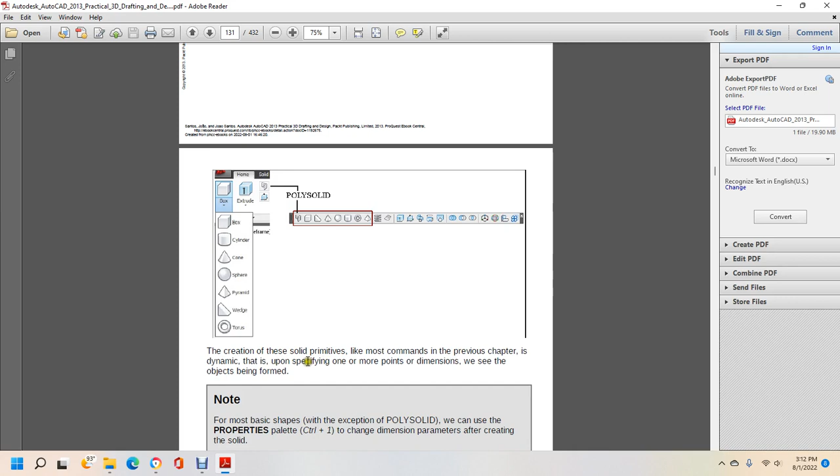Solid primitives list most of the commands from the previous chapter with dynamic input for specification. One or more important dimensions are seen as the objects are being formed. Note that for most basic shapes, with the exception of the polysolid, we can use the Properties palette, Control+1, and change the dimension parameters for creating the solid.

Improve the visibility of curved faces with the non-wireframe visual styles. This will apply with the Facet Resolution variable. A value of 2 or 3 is usually normal enough.

The wireframe visual styles may apply with the ISO Lines variable, which increments the number of lines used to represent the curved face. The Display Silhouette variable can also be used to show a silhouette profile line on solid curved faces, a variable explained at the end of chapter 4.

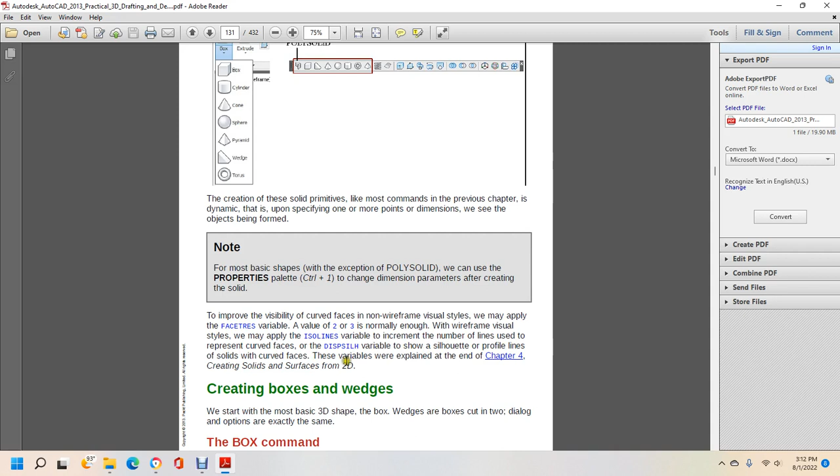Creating solids and surfaces from 2D objects.

Creating boxes and wedges. We show the most basic 3D shape, the box. Wedges are boxes cut into two, and the dialogue options are exactly the same.

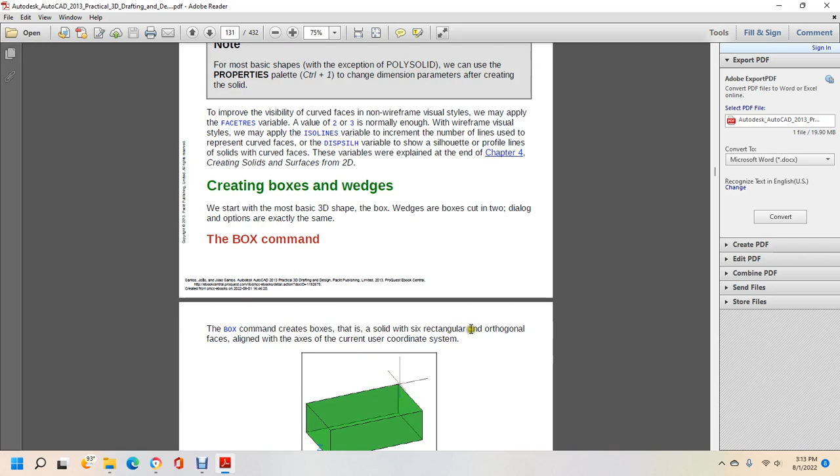The Box command creates a solid box with six rectangular orthogonal faces aligned with the axis of the current user coordinate system. By default the command asks for the first corner and the opposite corner. Command options are: first corner, opposite corner, cube, length, and point.

These two points must not be on the same axis, as they define the area of the base on the same plane. The height is then requested, specified with a negative value or created downward, specified with the height or a second point value. The easiest way to create a box is to specify the first corner and define the opposite corner relative to the first, specifying length, width, and height.

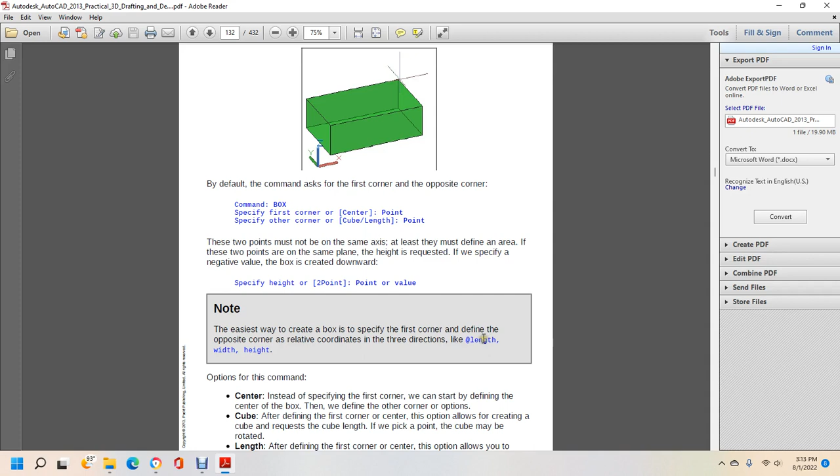Options of the command include Center. Instead of specifying the first corner, we can start by defining the center of the box, then define the other corner with the option. The Cube option, after defining the first corner or center, allows you to create a cube by requesting the cube length.

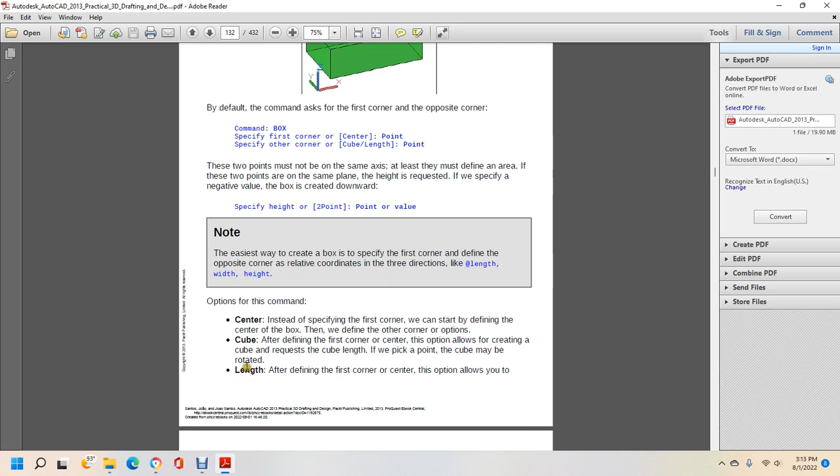If we pick a point, the cube may be rotated. The Length option, after defining the first corner or center, allows you to specify the length along the x-axis, the width along the y-axis, and the height along the z-axis of the box. If we pick a point to specify the length, the box may be rotated. The height of the box can also be defined by specifying two points.

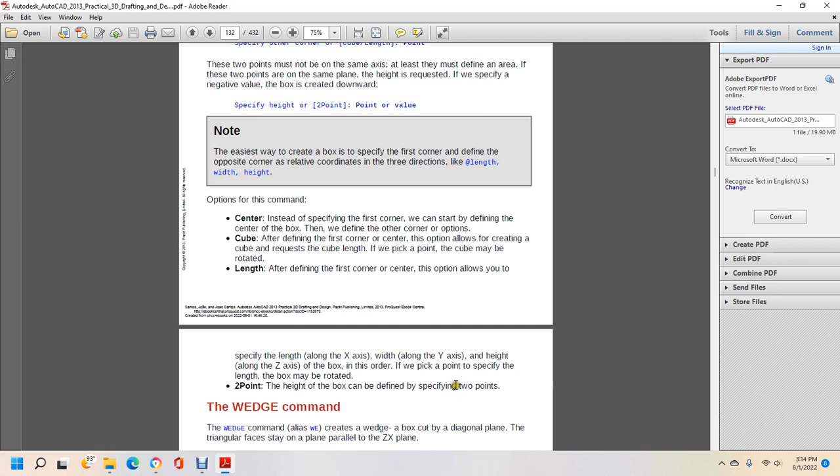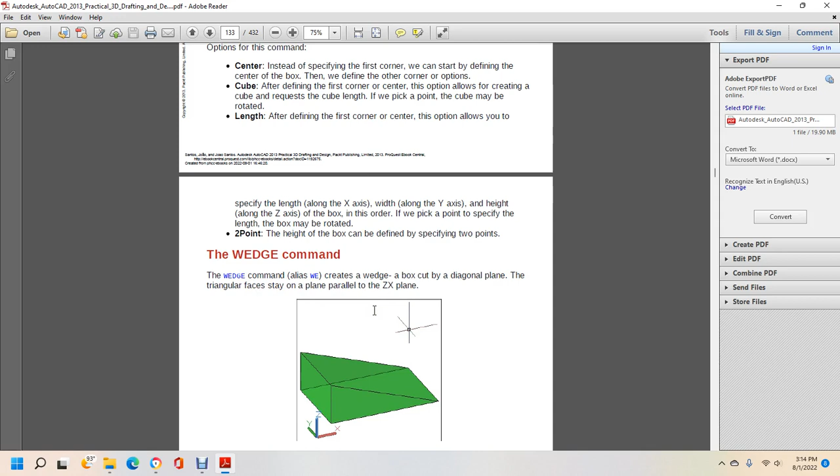The Wedge command, alias WE, creates a wedge, a box cut with a diagonal plane forming a triangular face parallel to the ZX plane. By default, the command asks for two corners: wedge, first corner or center point, other corner, cube, length, point. These points define the same base plane.

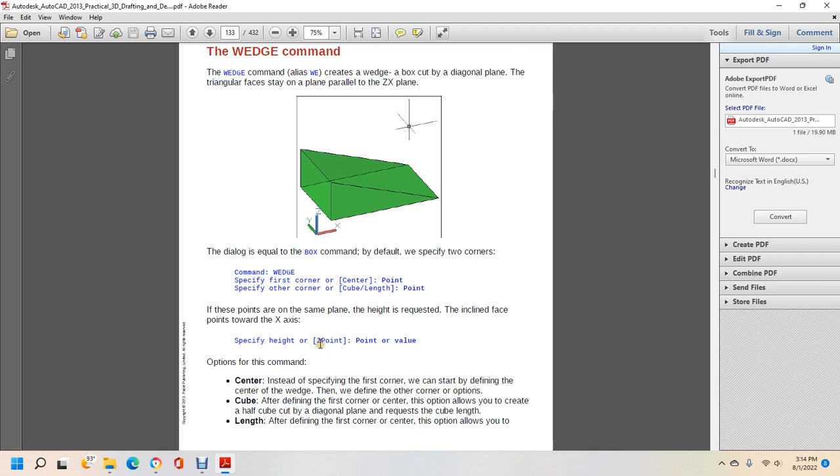The height is then requested, with the inclined face of the wedge pointing toward the x-axis, specified with the height or a second point value. Options for this command include Center.

Center: instead of specifying the first corner, we can start by defining the center of the wedge, then define the other corner with the option. Cube: after defining the first corner or center, this option allows you to create half a cube cut by a diagonal plane, by requesting the cube length.

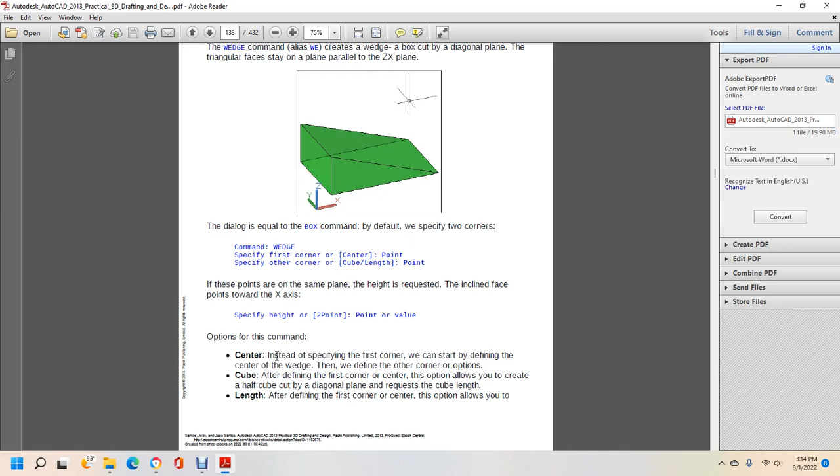Length: after defining the first corner or center, this option allows you to specify the length along the x-axis, the width along the y-axis, and the height along the z-axis of the wedge, in that order. The height of the wedge can also be defined by specifying two points.

We're going to create the basic shape of the building, similar to the cathedral. We start with a new drawing and create a layer called 3D cathedral, applied with the green color to make it current, then create a box.

The box has a length of 100, width of 40, and height of 45, with the first corner at the origin and the opposite corner at 100, 40, 45. We create another box whose center is in the middle of the top face.

We specify the center option of the Otrack function, aiming at finding the center over the top face. Another way to find the center is to apply the individual 3D Osnap center of the face.

Control mouse right click with the opposite corner, aiming at @15,15,20.

Later we will combine these boxes again, and create one tower with dimensions 10, 10, 30 at one of the top corners. We copy the last box from the top to the other top corner.

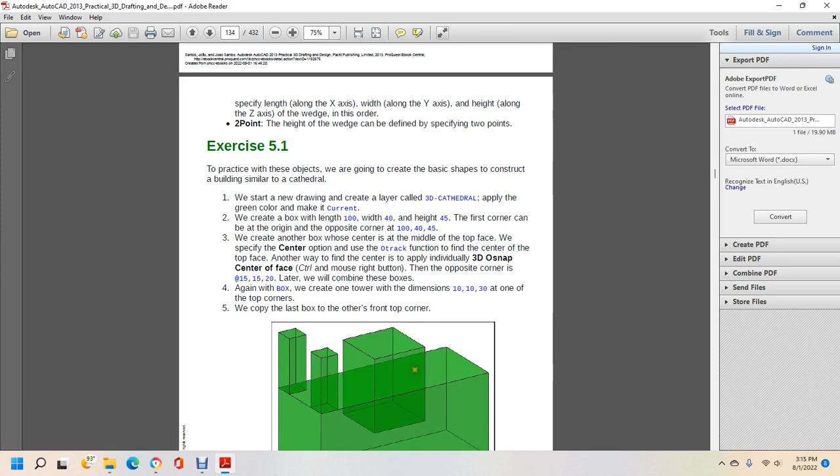Now it's time to create two wedges at the edge, like a buttress. We apply the wedge first to the left corner of the box, with dimensions 20, 5, 40. We create another wedge at the same first corner with dimensions 15, 5, and 30.

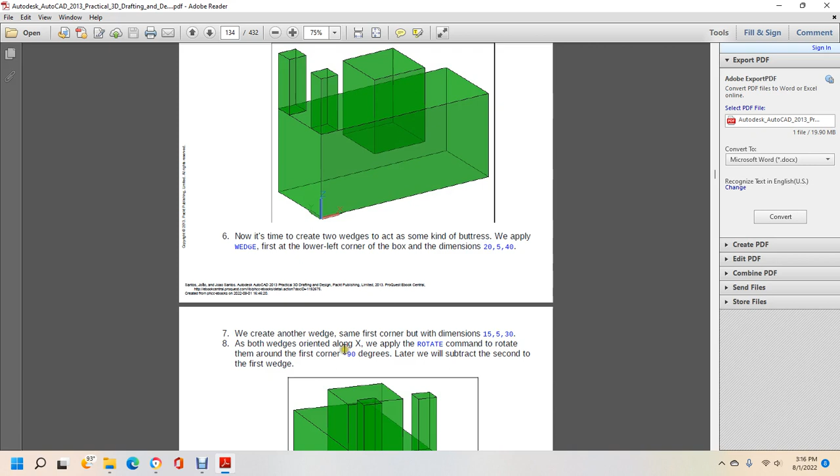As both wedges are oriented along X, we apply the rotate command to rotate it around the first corner by -90 degrees. Later we'll subtract the second from the first wedge.

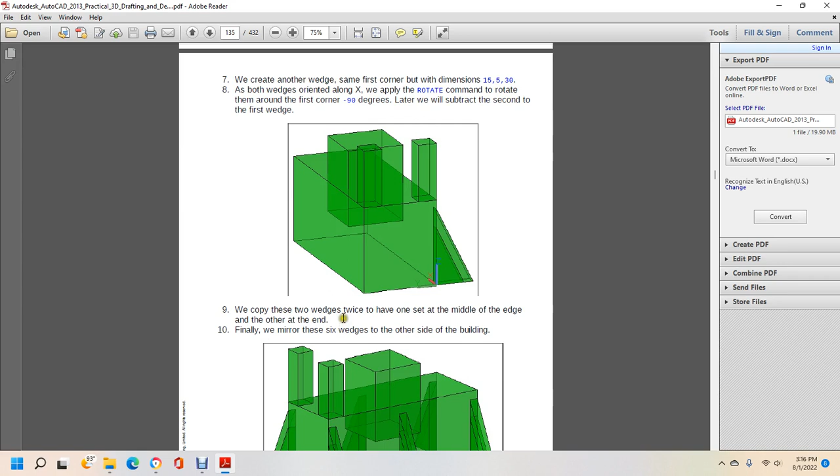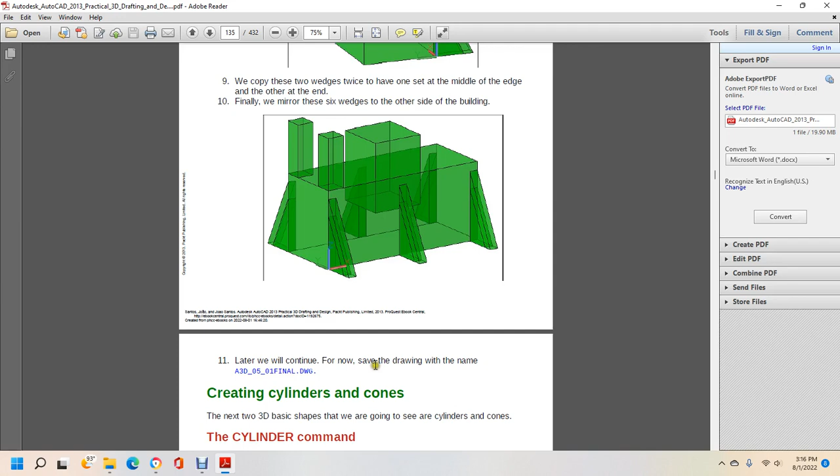We copy these two wedges twice to place one set at the middle and one at the other end of the edge. Finally, we mirror the six wedges to the other side of the building, and for now save the drawing as A3D_05_01FINAL.DWG.

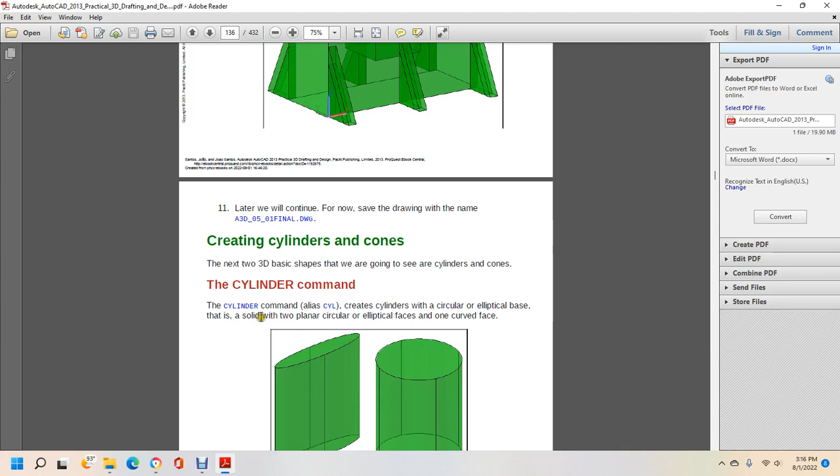Creating cylinders and cones. The next two 3D basic shapes we'll see are cylinders and cones. The cylinder command alias is CYL. It creates cylinders with circular or elliptical bases—solids with two planar circular or elliptical faces and one curved face.

By default, the command starts by prompting for the center of the base and the radius. The center option is the center of the base; you can also use 3-point, 2-point, tangent-tangent-radius, or elliptical options, then specify the base point and the radius or diameter value.

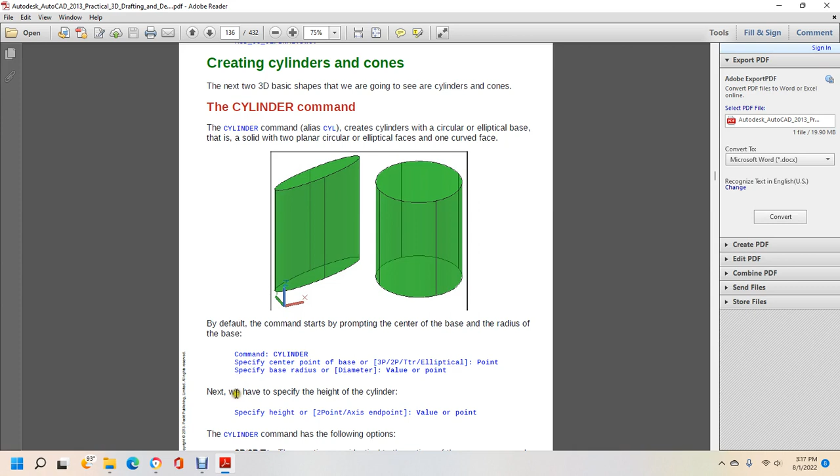Next we specify the height of the cylinder, using height, 2-point axis, or endpoint value. The cylinder command has the following options: 3P, 2P, or tangent-tangent-radius. These are identical to the options for the circle command.

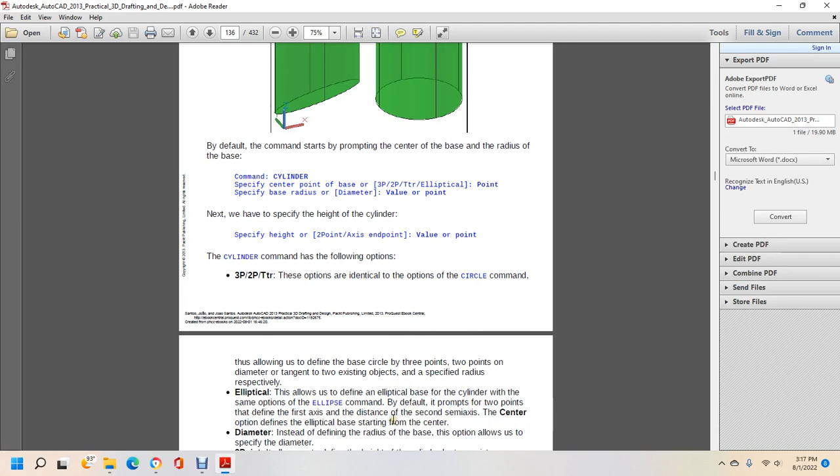This allows defining the base circle using 3 points, 2 points, or tangent to two existing objects while specifying the radius. The elliptical option allows you to define an elliptical base for the cylinder using the same options as the ellipse command.

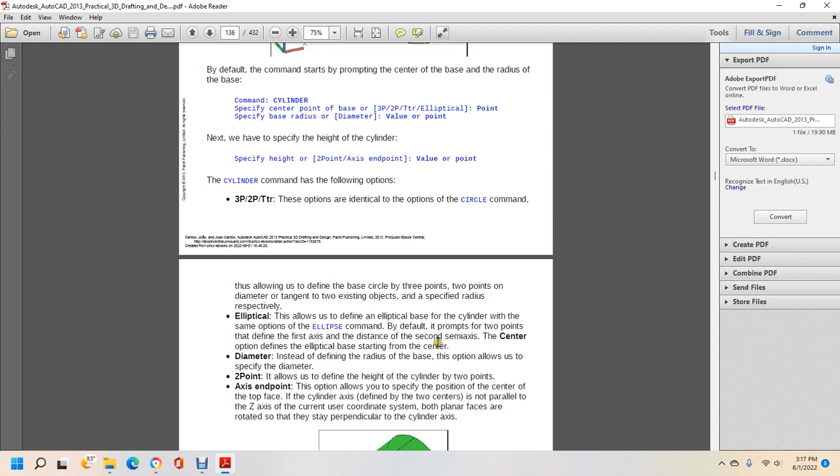By default, it prompts for 2 points to define the first axis and the second semi-axis, with a center option to define the elliptical base starting from the center, and a diameter option instead of defining the base by radius.

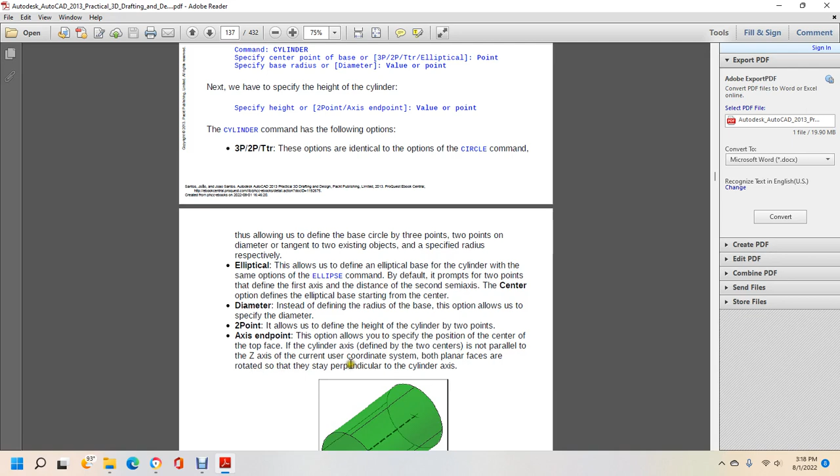The diameter option lets you specify the diameter by 2 points, and allows you to define the height of the cylinder. The axis endpoint option lets you specify the position of the center of the top face of the cylinder, defined by 2 centers not parallel to the Z-axis of the current user coordinate system, with both planar faces rotated perpendicular to the cylindrical axis.

The axis endpoint option allows us to create cylinders with bases not aligned to the current XY work plane, which may avoid the need to create a specific user coordinate system.

Now the cone command. The cone command, which has no alias, allows you to create cones or frustum cones.

In the first case, the object is composed of a curved face and a planar face; in the second case, it has two planar faces with a curved face.

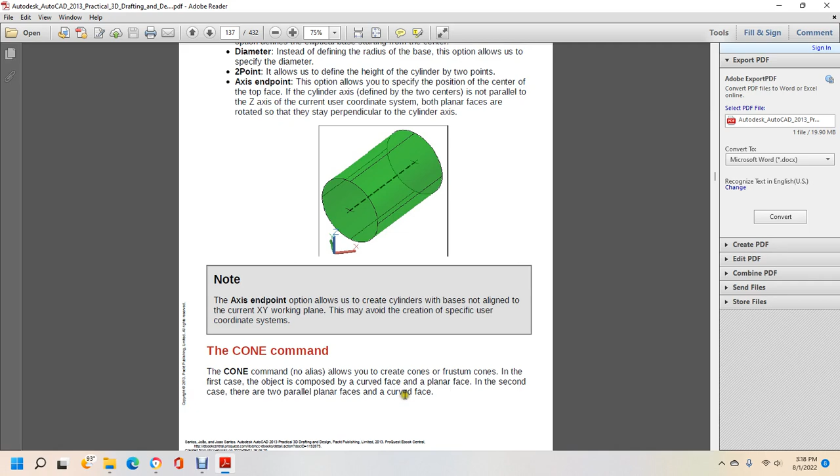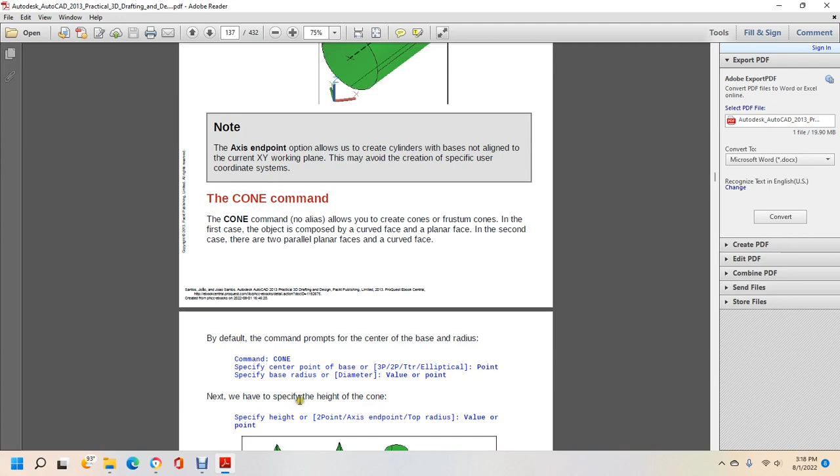By default, the command prompts for center, base, and radius. The cone command options include center and base and radius, 3-point, 2-point, tangent radius, elliptical. You then choose your point and specify the base radius or diameter with a value or point. Next, specify the height of the cone, or use 2-point axis endpoint, top radius value, and give the value of the radius or point.

Most of these options are similar to the cylinder command: center, 3-point, 2-point, tangent radius. These are identical options, but the circle command allows you to define the base of the circle by 3 point, 2 point with diameter, tangent to two existing objects, or specified radius respectively.

Elliptical allows you to define an elliptical base of the cone with the same options as the ellipse command, but the default prompt is with 2 points defining the first axis and the second semi-axis, with the center option defined with the elliptical base starting from the center. The diameter option, instead of defining the radius of the base, allows us to specify the diameter.

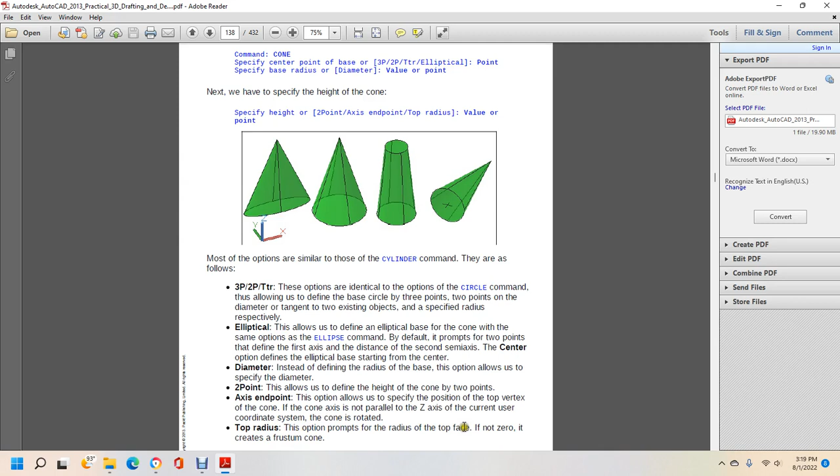The 2-point option allows us to define the height of the cone by 2 points. The axis endpoint option allows you to specify the position of the top vertex of the cone; the cone axis is rotated if it's not parallel to the Z-axis of the current user coordinate system. The top radius option prompts for the radius of the top face if it's not 0, and if so, creates a frustum cone.

Alright, exercise 5.2. Now we continue exercise 5.2. Let's open the drawing starting with exercise 5.1.

Continuing with the model of the building, we create a new cylinder with the center of its base at the center of the top face of the previous cylinder, with a radius of 8 and a height of 10. To create the columns, again using cylinders, with the center at the 180 degree quadrant on the top face of the first cylinder, with a radius of 0.8 and a height of 10. We move the cylinders inward by 1 in the X direction.

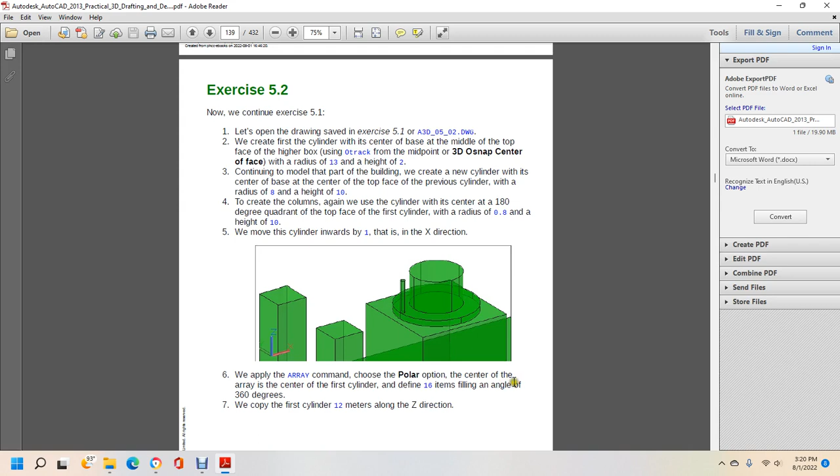Then, after showing the picture, we apply the array command, choosing the polar option, centering the array on the center of the first cylinder, defining 16 items filling an angle of 360 degrees, copying the first cylinder, 12 meters along the Z direction.

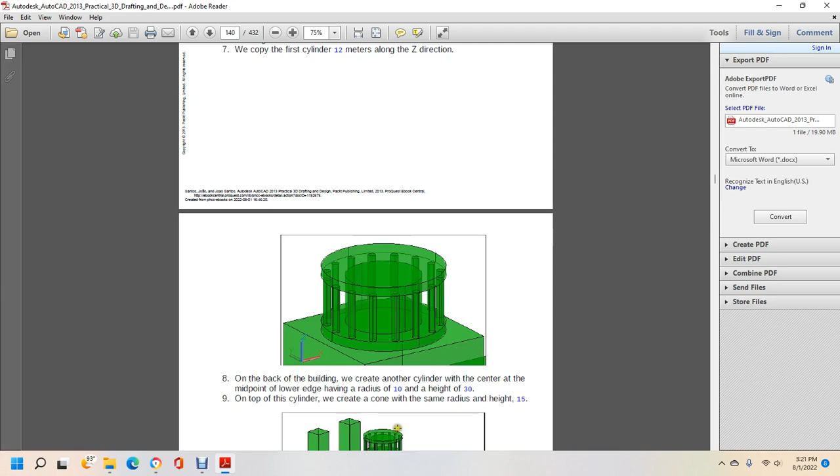On the back of the building we create another cylinder with the center at the midpoint of the lower edge, with a radius of 10 and a height of 30. On top of the cylinder we create a cone of the same radius with a height of 15. We save the drawing.

Save as A3D_05_02FINAL drawing, creating a sphere and another basic shape, the sphere or globe, created with the next command.

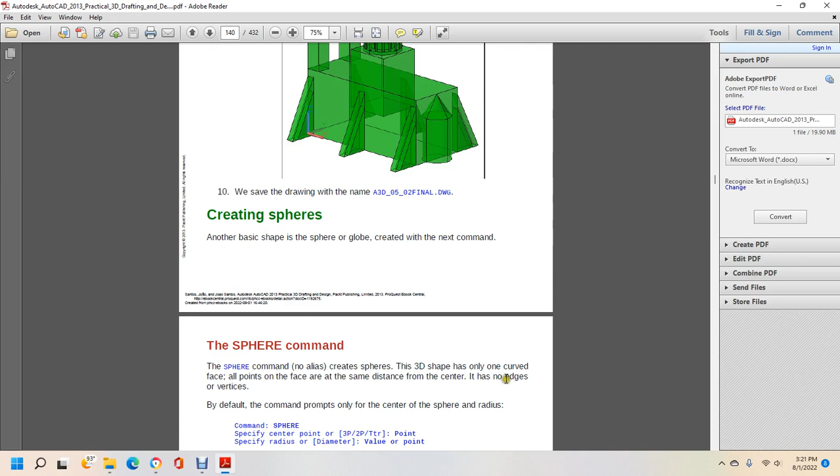The sphere command in AutoCAD creates a sphere, a 3D shape that has only one curved face, while all points of the face are the same distance from the center, with no edge or vertex. By default, the command prompts for the center of the sphere, the radius of the sphere, the center point, 3-point, 2-point, tangent, radius.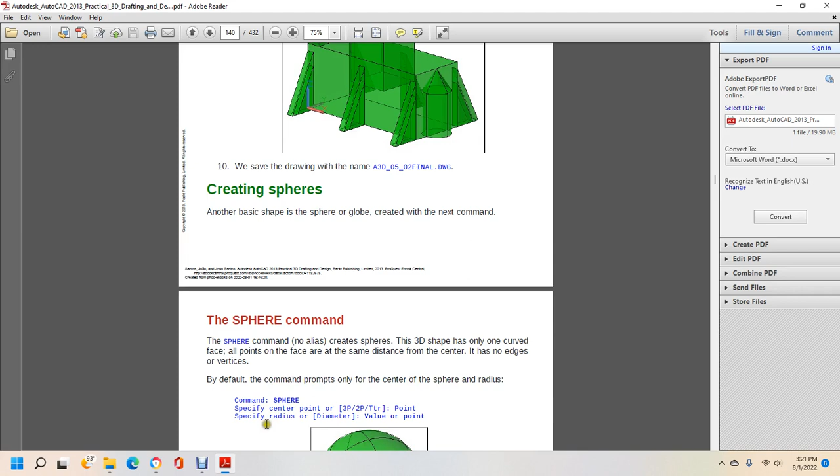Point specifies the radius or diameter with a value or point, and then shows the sphere option, similar to the previous command: 3-point, 2-point, and tangent radius.

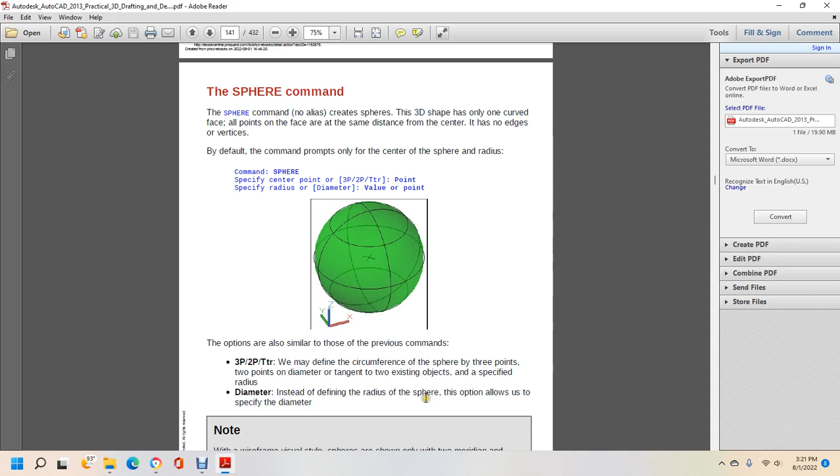We define the circumference of the sphere with 3 points, with 2 points, with a diameter, or tangent to two existing objects, specified with the radius. The diameter option, instead of defining the radius of the sphere, allows us to specify the diameter. Note that the wireframe visual style of the sphere shows only two meridians and three parallel iso lines.

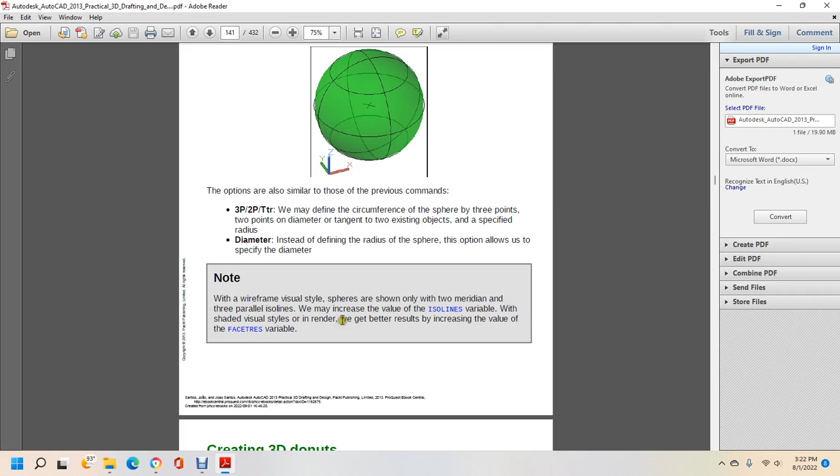We may increase the value of the ISOLINES variable with the shaded visual style with the render. We get the best result by increasing the value of the facet resolution variable.

Creating 3D donuts: if you want a solid shape like a donut, the torus, the shape can also be obtained by applying the revolve command to a circle. The torus command, alias TOR, creates toroid solids with a 3D donut shape. By default, the command prompts for the center of the torus, the radius of the torus, the radius of the circular section, and options like torus bisects the XY plane of the current user coordinate system.

The command prompt is: TORUS, specify center point or [3P (3 point)/2P (2 point)/Ttr (tangent tangent radius)], specify radius or [Diameter] for the torus, then specify the tube radius or [2Point/Diameter] for the second value.

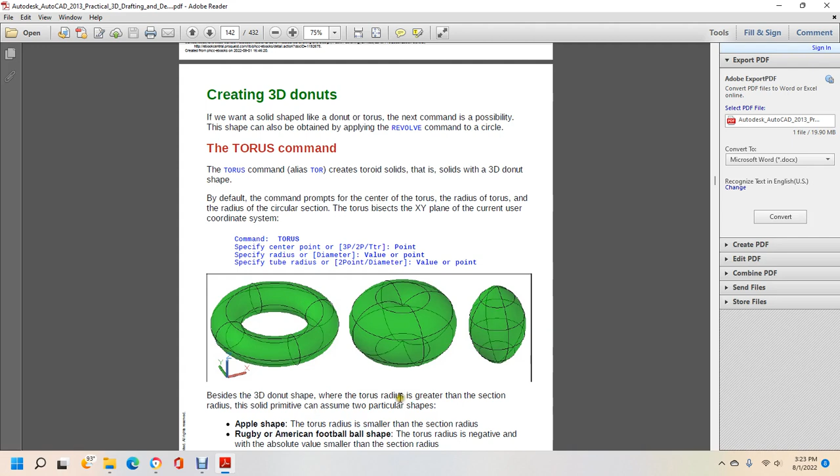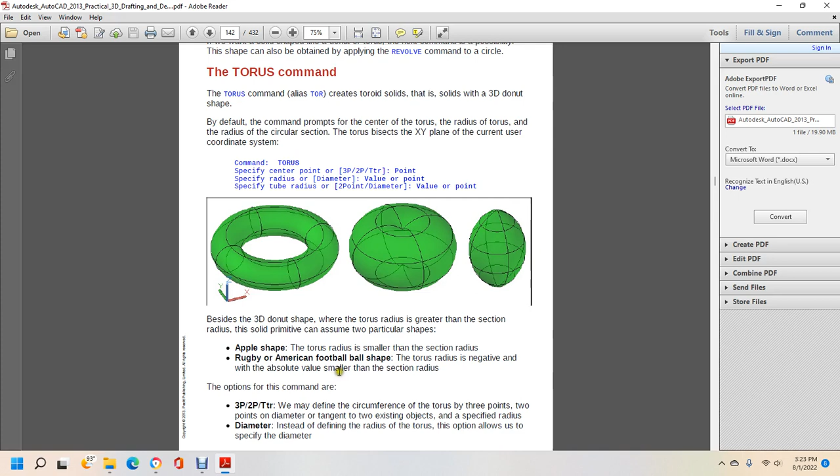The 3-point and tangent-tangent-radius options let us define the circumference of the torus. With 3 points or 2 points with a diameter, or with tangent to two existing objects with a specified radius.

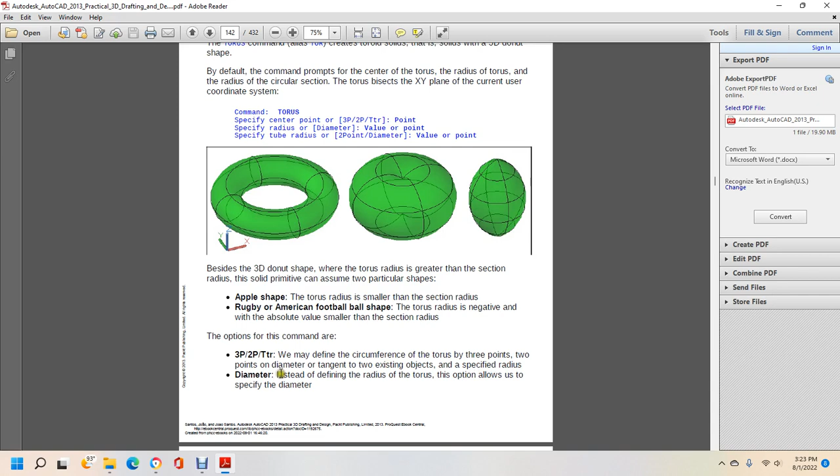Exercise 5.3: we are placing some elements into our cathedral. Open a drawing, saved from exercise 5.2, the A3D0503 drawing. Create a sphere at the top, highest cylinder, with its center coincident with the center of the top face, with a radius of 13.

This center can also be reached using the quadrant point. Later we will cut the sphere in half, forming a dome.

Apply the User Coordinate System command. Create a coordinate system aligned with the front facade, with the origin at the lower left corner. For the first block, define the X axis with the other lower corner, and the X, Y plane with the top corner, aligned with the face, using the user coordinate system.

This allows control of the precise position of the torus. Use the torus command, pausing over the midpoint of the lower edge. Place a point along the Y direction at 30. The Otrack function must be on.

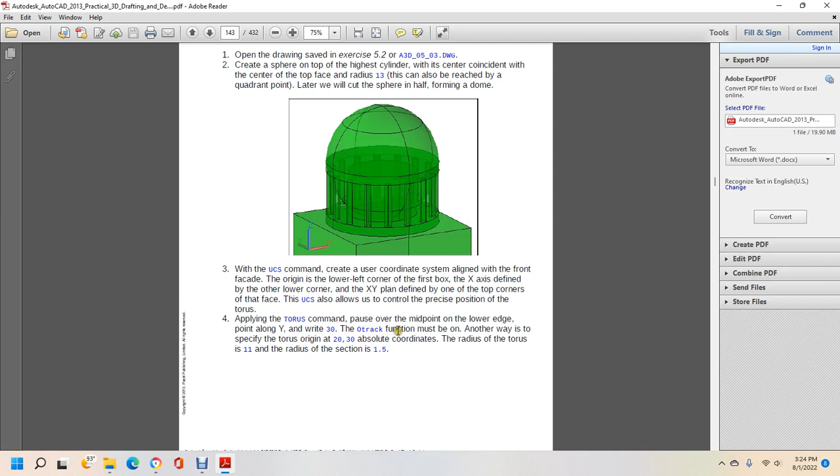Another way to specify the torus origin is with absolute coordinates 20, 30. The radius of the torus is 11, and the radius of the section is 1.5.

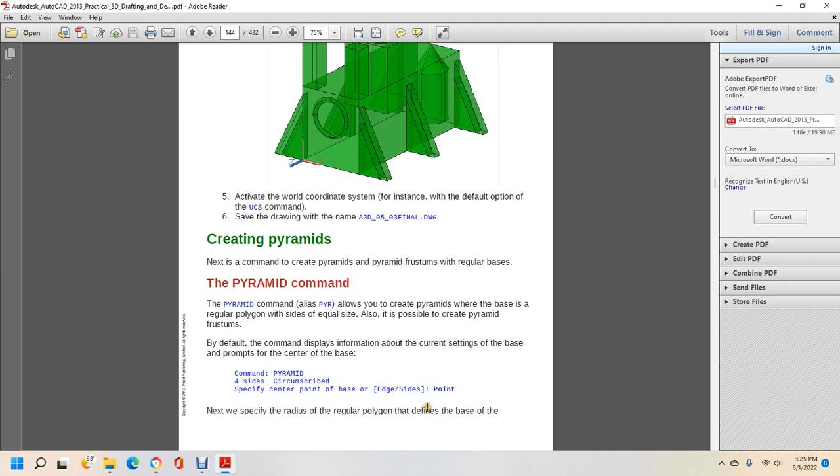Command: PYRAMID, 4 sides, circumscribed. Specify center point of base or [Edge/Sides]: Point, then specify the radius of the regular polygon to define the base of the pyramid according to the displayed options, specifying the base radius or [Inscribed] value point.

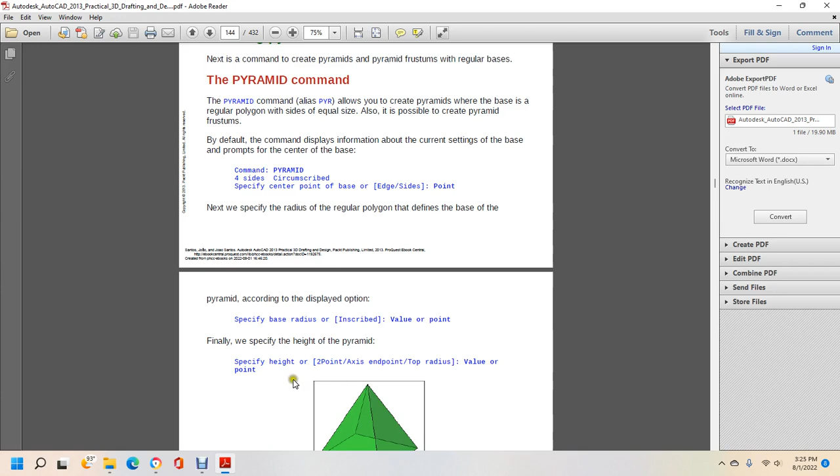Finally, we specify the height of the pyramid, specify height or [2Point/Axis endpoint/Top radius] value or point. The options available for this command include Edge instead of center, where you specify two points to define one side of the base, similar to the option in the polygon command.

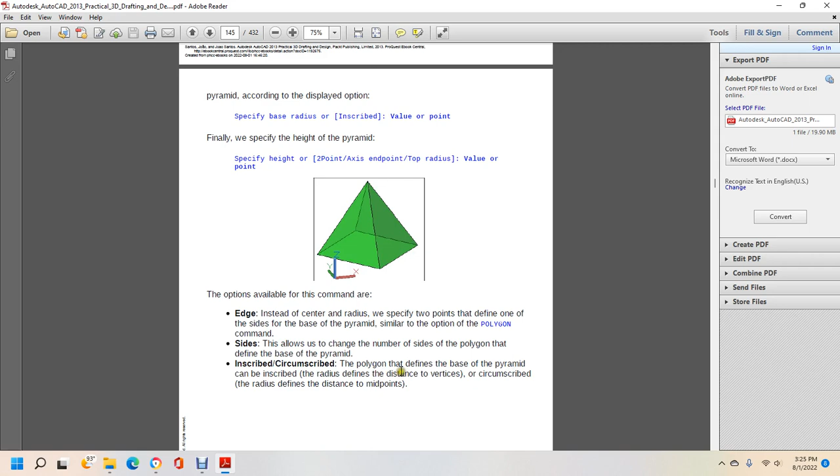Sides allows you to change the number of sides of the polygon described at the base of the pyramid. Inscribe or circumscribe defines the polygon with the base of the pyramid. Inscribed uses the radius to define the distance to vertices; circumscribed uses the radius to find the distance to midpoints. Choose 6 sides and circumscribed or inscribed.

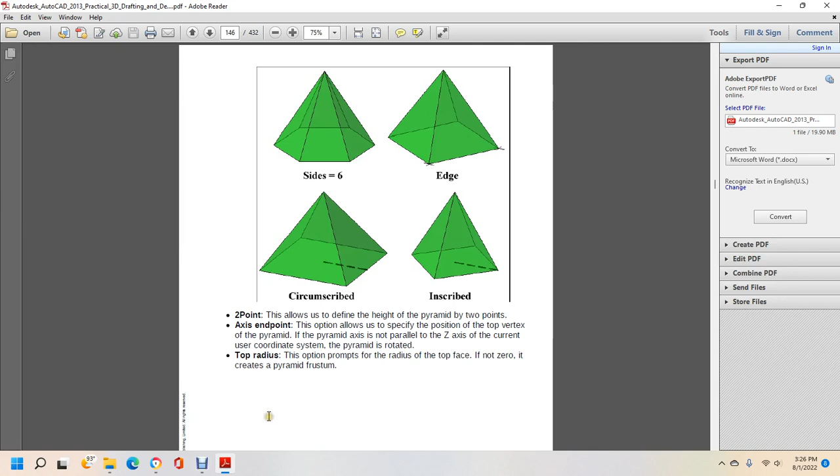2-point allows you to set the height of the pyramid by two points along the axis. Endpoint allows you to set the position of the top vertex of the pyramid. If the pyramid axis is not parallel to the z-axis of the current user coordinate system, so the pyramid is rotated. Top radius prompts for the radius of the top face if it's not 0, creating a pyramid frustum. Options: axis endpoint, axis, top radius.

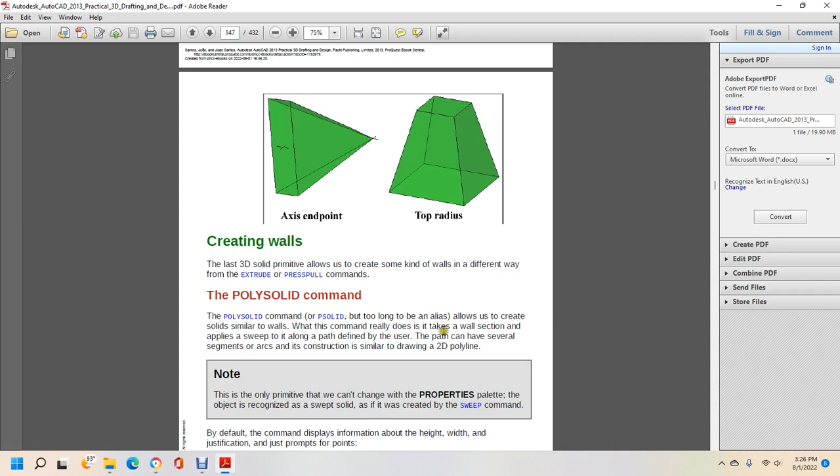Creating walls: this last 3D solid primitive allows you to create walls in a different way from extruding and PRESSPULL commands. The polysolid command, alias PSOLID, allows you to create solids similar to walls. This command takes the wall section and sweeps it along a path, which can have several segments, similar to drawing a 2D polyline. Note this is the only primitive we can't change with the properties palette - it's recognized as a swept solid as if it was created with the sweep command.

By default the command displays information on height, width, and justification, then prompts you at this point. Command: height, width, and justification center. Specify the start point, then object height, width, justification, object, and give the point. Specify the next point, or arc, undo, and a point. Specify the next point, arc, undo.

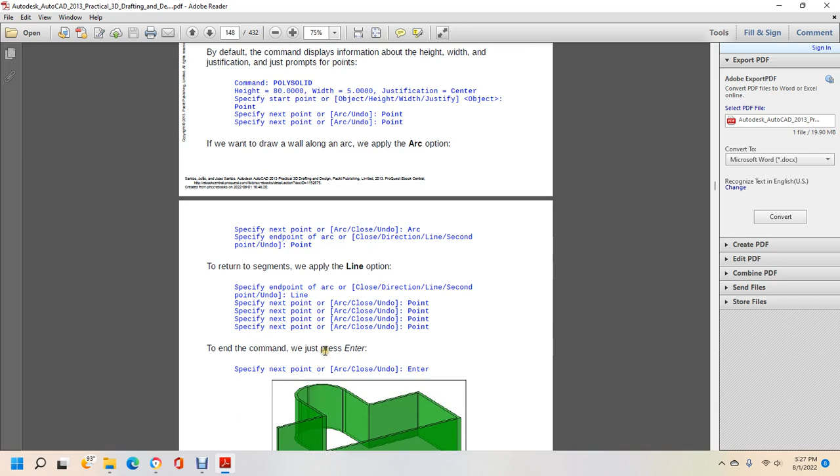If you want to draw the wall along an arc, apply the arc option. Specify the next point over the arc, specify the end of the arc, and a closed direction, line, or second point, then point to the point. To return to straight segments, apply the line option, specifying the endpoint with closed direction, line, second point, until the line. Specify the next point, arc, close, or undo, then the points around. To end the command, just press enter: specify the next point, and arc, close, or enter to end.

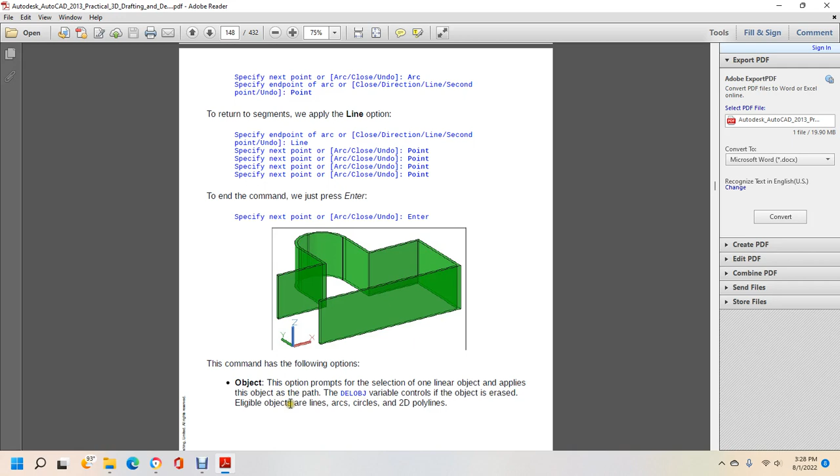This command has the following options. Object prompts for the selection of a linear object applied as the path, with the DELOBJ variable controlling whether the object is erased. The eligible objects are lines, arcs, circles, or 2D polylines.

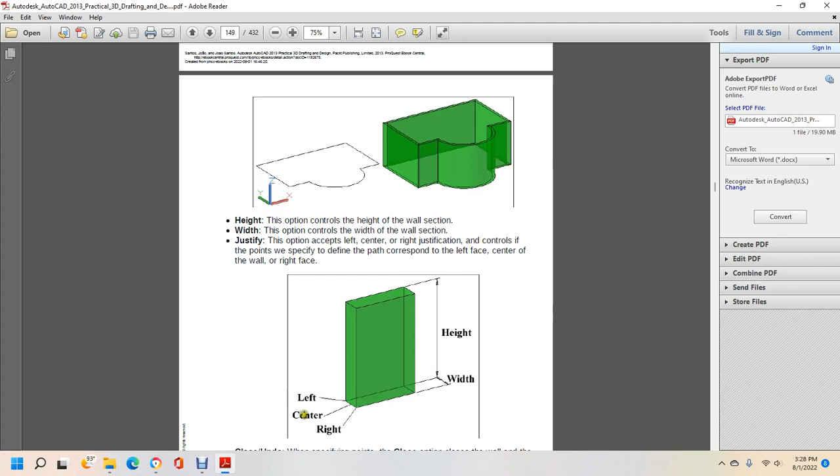Height controls the height of the wall section; width controls the width of the wall section. Justify accepts left, center, or right justification, controlling the point we specify - defining the path corresponding to the left face, center, or right face of the wall: left, width-left, center, right. Close and undo: the close option closes the wall, while undo cancels the last point, like in the PLINE command.

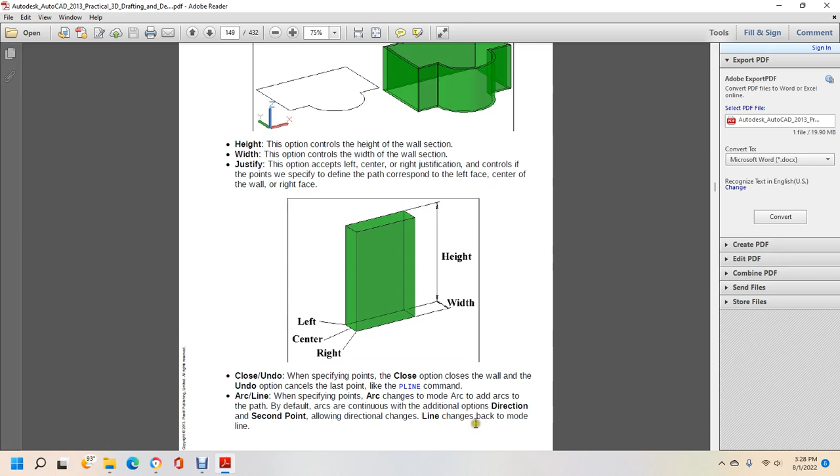Arc and line: when specifying arc, it changes the mode to add arcs to the path. By default, arc continues, with the additional option of direction - second point allowing directional changes. Line changes back to line mode. For a complex path, it's better to draw a 2D polyline first and then apply the object option.

Exercise 5.4: continuing the exercise of the pyramid application, perform the following steps for the wall. Open the drawing saved as exercise 5.3, A3D_05_04. On top of one of the towers, apply the pyramid command with the edge option, specifying two sides for the corner, with a height of 15. Copy the pyramid to the other tower.

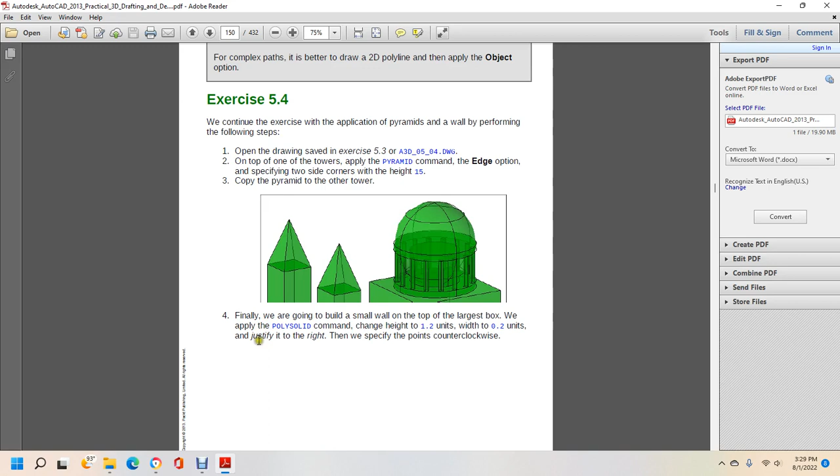Finally, we're going to build a small wall at the top of the largest box by applying the polysolid command. Set the height to 1.2 units, width to 0.2, and justify to the right. Specify the points counterclockwise.

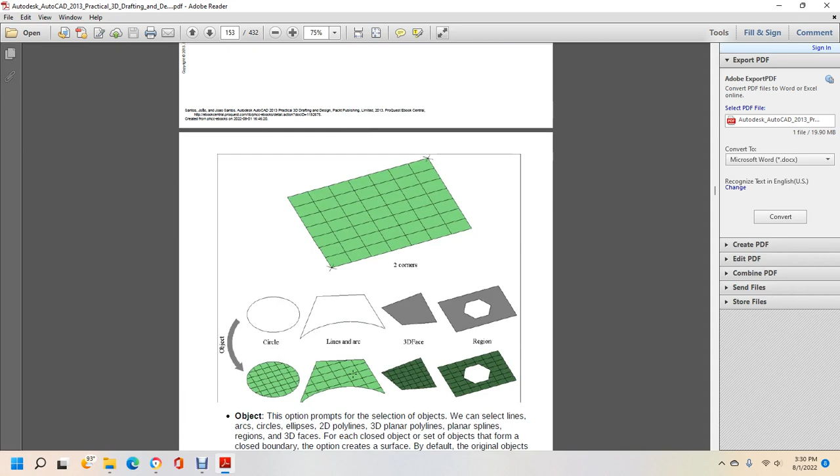We can select circles, lines, arcs, 3D faces, or regions as the objects for the planar surface. The object option prompts selection of objects such as lines, arcs, circles, ellipses, 2D polylines, 3D polylines, planar splines, regions, and 3D faces. For each closed object, the set of objects should form a closed boundary, and the option creates the surface while maintaining the original object in the drawing by default.

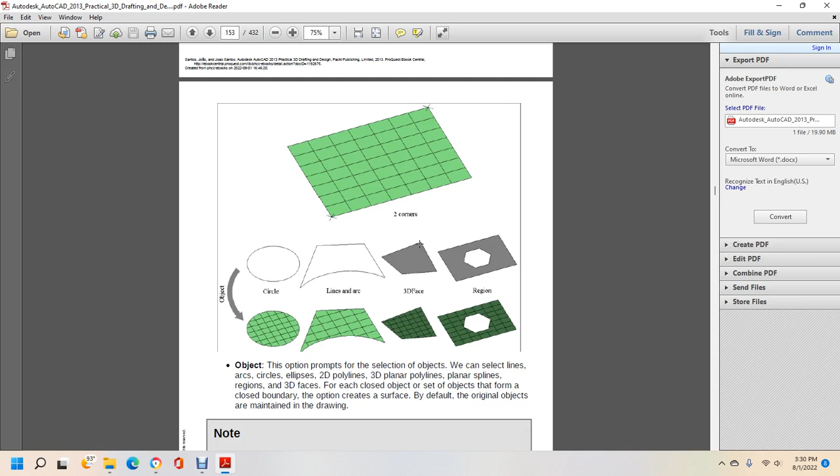Note: there are two important variables for creating the surface from the other object. The surface associativity variable controls whether the surface remains connected with the original object; value 1 means associative, value 0 means not. This variable is saved within the drawing with a default value of 1. The delete object variable determines whether AutoCAD deletes the original object after creating the surface; by default it does not delete the original object.

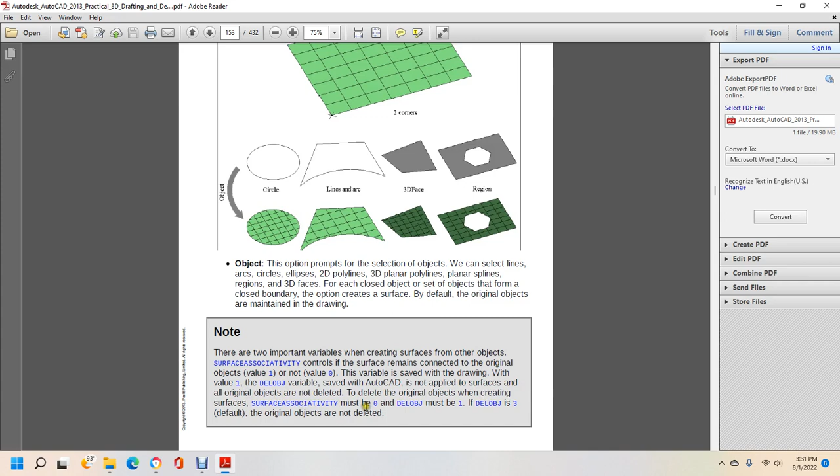For the surface to be non-associated, associativity must be set to 0, and delete object must be set to 1. By default, delete object is 3, meaning the original objects are not deleted.

In several situations, the 3D face command can be used instead of the planar surface command, as presented in the chapter on mesh and surfaces. A planar face is created by specifying only 3 or 4 corners. The advantage is that we can stretch the corners using grips, anywhere in 3D space, independent of the current user coordinate system. For instance, we can easily create a vertical face to simulate a door or window. These faces can be converted to surfaces using the planar surface command.

Conversion between 3D objects. There are two commands that convert objects to solids or surfaces, concluding the creation process. These commands can be found in the menu or ribbon, under Modify for 3D Operations, or on the Home tab under Solid Editing: Convert Object to Solid. These commands convert certain types of objects to solids.

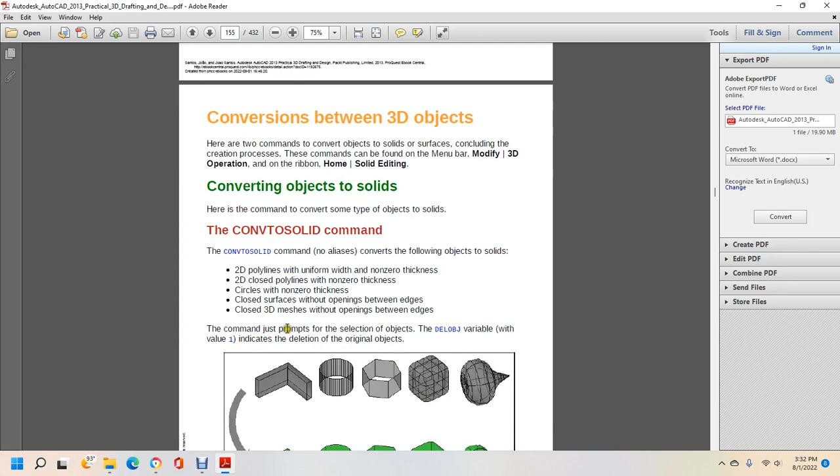The Convert to Solid command, with no alias, converts the following objects: 2D polylines with uniform non-zero thickness, 2D closed polylines with non-zero thickness, circles with non-zero thickness, closed surfaces without openings between edges, and closed 3D meshes without openings between edges. The command just prompts for selection; the delete object variable with value 1 indicates deletion of the original object.

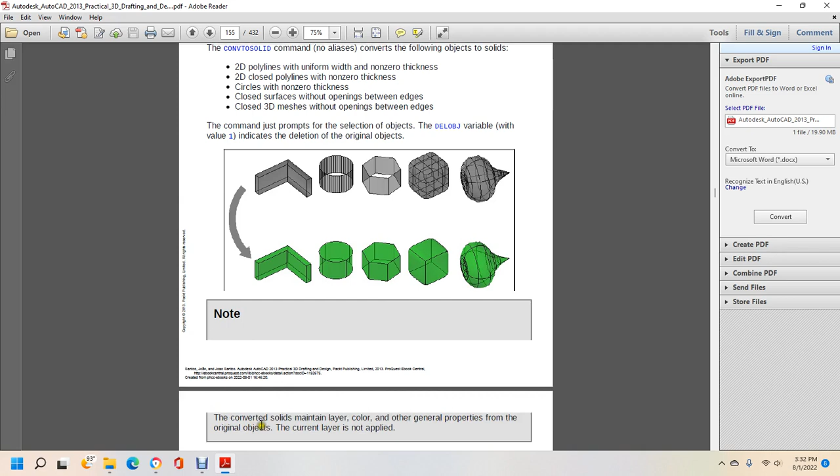Note: the converted solid maintains layer, color, and general properties from the original object. The current layer is not applied. That covers converting objects to solid.

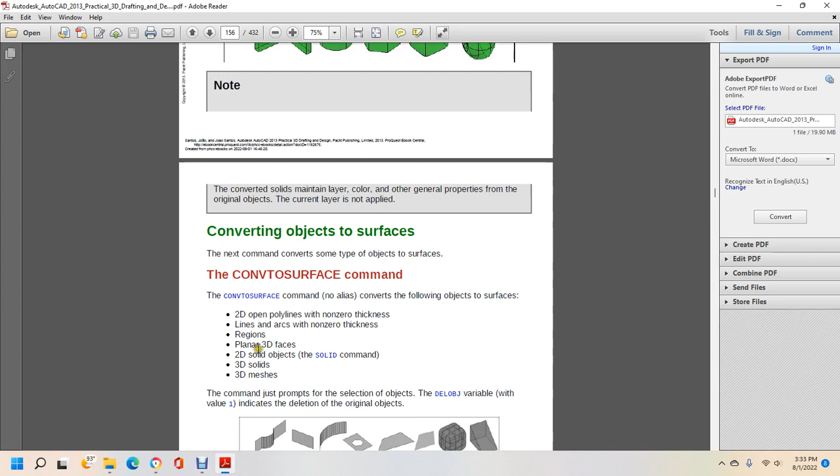Converting objects to surface: the next command converts some types of objects to surfaces. The Convert to Surface command converts the following objects to surfaces: 2D open polylines with non-zero thickness, lines and arcs with non-zero thickness, regions, planar 3D faces, 2D solids, 3D solids, and 3D meshes. The command just prompts for selection; the delete object value of 1 indicates deletion of the original objects. So that covers conversion to surface.

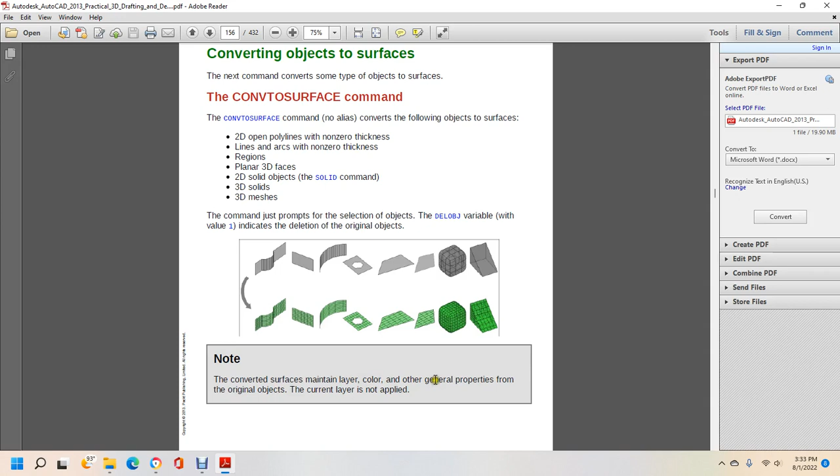The converted surface maintains layer, color, and general properties from the original object. The current layer is not applied.

This chapter covered all basic 3D shapes and 3D primitives, along with the construction of simple 3D models, including the box, wedge, cylinder, cone, sphere, torus, pyramid, and polysolid. We also covered the planar surface command for creating planar surfaces, and the two commands for converting existing geometry to solids and surfaces: Convert to Solid and Convert to Surface.